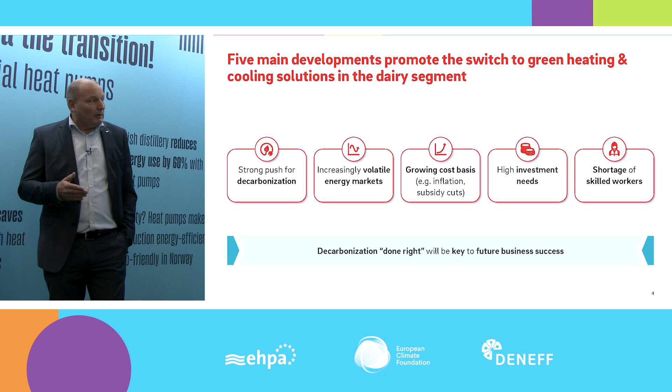These are the 5 main developments we are going to promote. It's a strong push for decarbonization we see in the market. Everyone is asking us, how can we do this, especially under the ongoing threat we see in the current energy price development. We see very volatile energy markets, especially in power generation. Of course, we are phasing out large-scale power plants in the near future in most European countries and we have to renew the power, and how can we solve this?

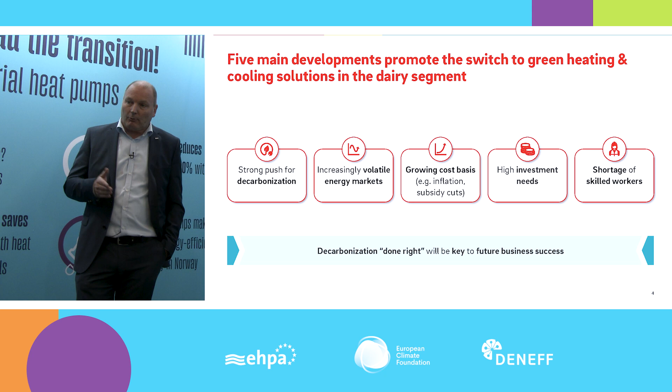We see the high investment needs in those projects as well. And a very, very crucial topic is the shortage of skilled workers we have. We have to implement these projects. And as you see, for instance, we are going to invest more than 43 billion euros in the next 4 years as E.ON Group in grids and projects across Europe.

But we need really good and many skilled workers to realize all these projects, because here we really see a shortage in the market. So the decarbonization done right will be, of course, for our clients as well as for us, a very big piece of the future business. And therefore, we really need to develop our solutions jointly with our customers.

Next slide, please. We always build together dedicated projects. We do not take any project off the shelf. Every project is unique in our development, and that's the very core of the business we are doing.

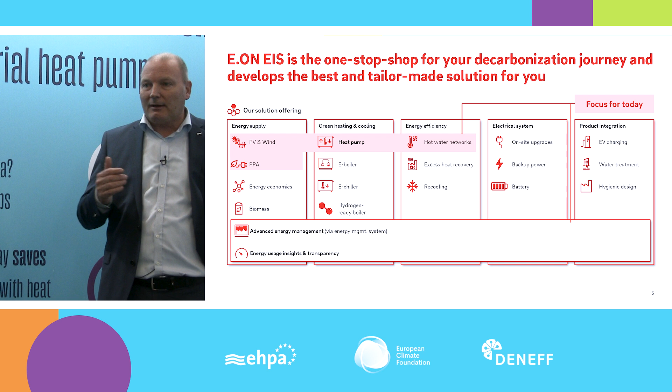So what we are focusing on here is heat pumps, and we will later talk about high temperature heat pumps, because heat pumps as a mass product is not meant here. It's really the industrial design of heat pumps for high temperature processes. And this is, from our perspective, also the key driver in the future we need to tackle.

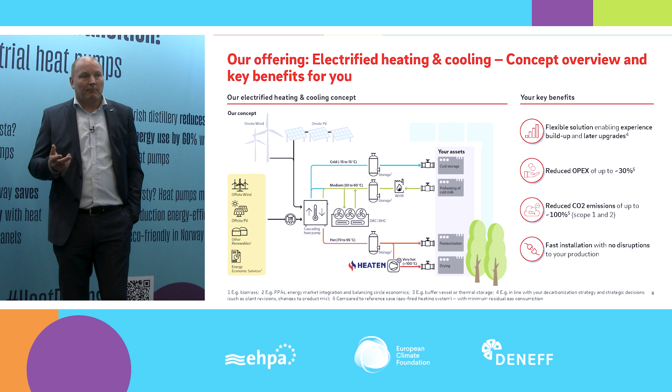So next slide, please. Here I've shown a typical solution of the future we see. So of course we need a large portion of renewable energies in the future. That means either on-site or mostly off-site, we need to generate green power. Green power can come from wind, solar fields, biogas, biomass solutions as well, and other sources in the future like hydrogen. But as long as we do not have a really mature market to replace natural gas by hydrogen, we really need to find other solutions, integrating PV and wind assets into the decarbonization roadmap we see in our client base.

So if you then deliver the power on site, we want to install large-scale heat pumps using waste heat potentials from customer sources on site, from production processes, from cooling processes, for instance, or other environmental heat sources like rivers, and then boost this up in a big heat pump to get to green heat. So we see here a dairy process where we can do this. We can do it for cool storage. We can do preheating of the cold milk, the pasteurization process and the drying process in the future via heat pumps. These are the core elements we are going to identify.

But what is key in all of these projects is you really have to look into the existing infrastructure on the premises of the client and what needs to be optimized there to run the heat pump in the most efficient way. Otherwise, the heat pump does not make sense if the secondary system behind it is not really adapted to the heat pump. So this is a crucial part of the whole project, and there we go with our engineers into the field, look into the details at the client sites and make a proposal.

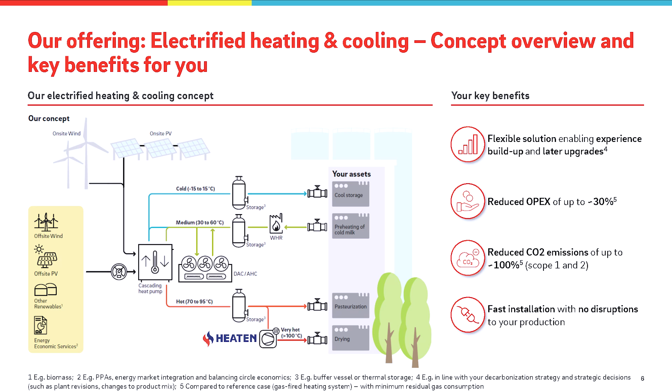And what are the key benefits? You can reduce your OPEX. If you go for such a solution, you are pretty flexible with regard to power and cooling generation with heat pumps as well. You can reduce your carbon emissions by 100% with green electricity running a heat pump, and you have a fast installation without big disruptions of the processes on your end. So this is a very big advantage of heat pump systems.

Next slide, please. Yes, this is a typical process of how we go into such projects. So first of all, we get in touch with you and make the first presentation of what a solution could look like. If you're interested, we sign an NDA together to exchange the data and information needed to run our simulations. What might be the best concept? Within 6 to 8 weeks, we make a first initial concept for such a project, and then we discuss it jointly with our clients, whether this is the right way forward, where it may need to be fine-tuned, and how we can then come to the final project setup.

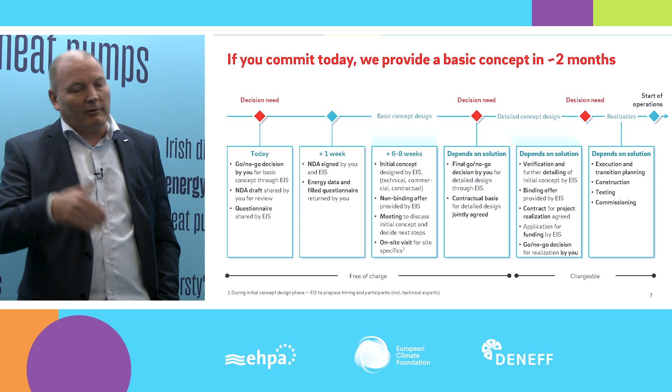And afterwards, when the decision is taken, we really go on to the next steps and develop the project until the end, into the contract, into the realization phase, where we take responsibility for the execution and the transition planning, the testing, commissioning, and all stuff like that before we hand it over to our clients.

And this is a typical way forward in our projects. And at the moment, we are running a lot of those projects across Europe. And you are sitting here in one of these buildings where we are also going to install a multi-megawatt heat pump to produce cooling and heating. So this is a very interesting project, and we are also proud of being part of the project as well.

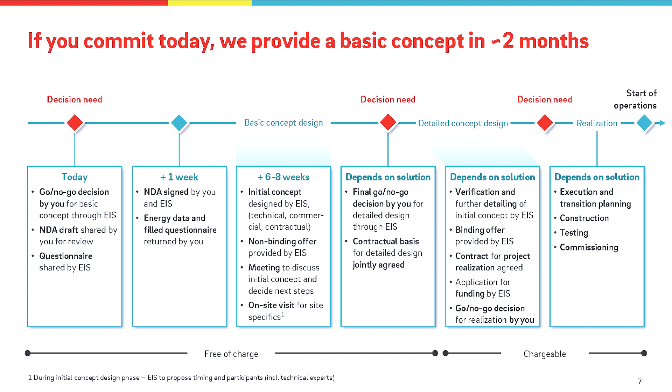So from our belief, heat pumps are really the core technology for the future to decarbonize the industry. And we are happy to support. And now I would like to hand over to André from Heaten.

Thank you, Christoph, for the nice introduction. My name is André Bechem. I'm the head of sales of Heaten. And now a few words about Heaten. So I think all of you are familiar with E.ON, but I think not everyone has heard about Heaten.

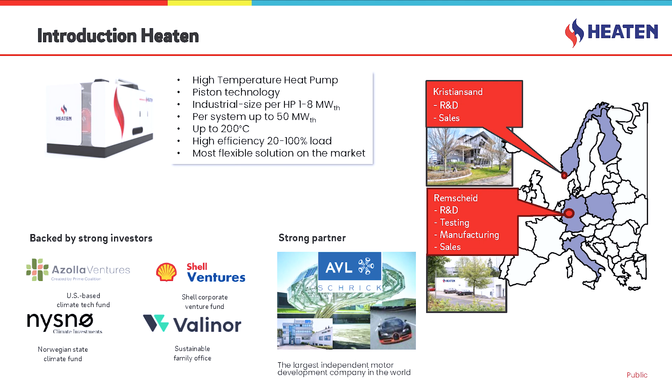Heaten has developed and produces and sells high temperature heat pumps. It's a piston-based technology with an industrial size of 1 to 8 megawatt per heat pump. We can reach up to 50 megawatt per system if we install it in parallel or in a cascade. And we can reach temperatures up to 200 degrees.

And due to the piston-based technology, we have a very high efficiency over a broad operating range of between 20 and 100% load. And due to this, we are the most flexible solution on the market in this megawatt range.

Currently, we have our head office in Kristiansand in the south of Norway, where we have our R&D and sales. In Remscheid, just 35 minutes from here, we have also our R&D department. We have the test bed and the testing, the manufacturing and the sales.

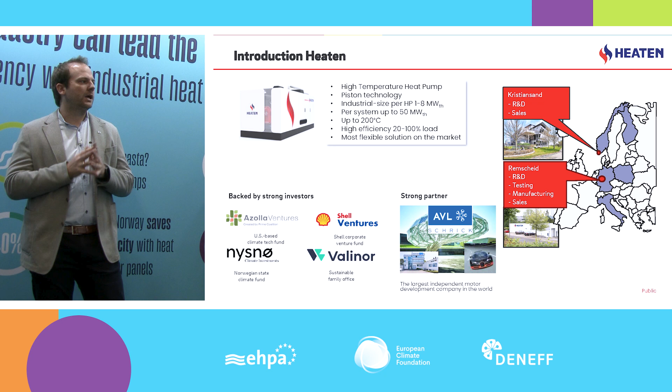We are supported in the development by a very strong partner, AVL. AVL is the largest independent powertrain developer worldwide, and they are the expert when it comes to piston-based engine and compressor development. And we are also backed by very strong investors. We have Azolla Ventures, Shell Ventures, Nysnø, the Norwegian State Climate Fund, and Valinor behind us.

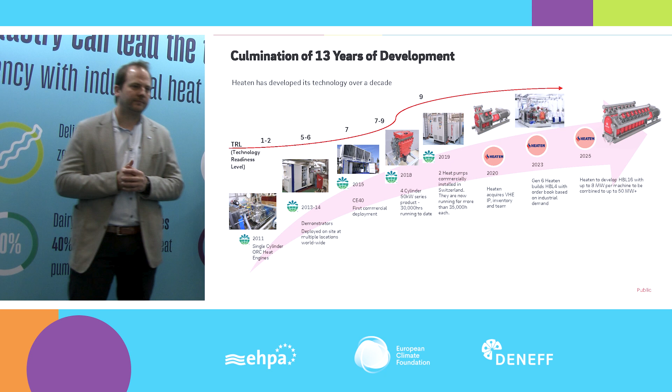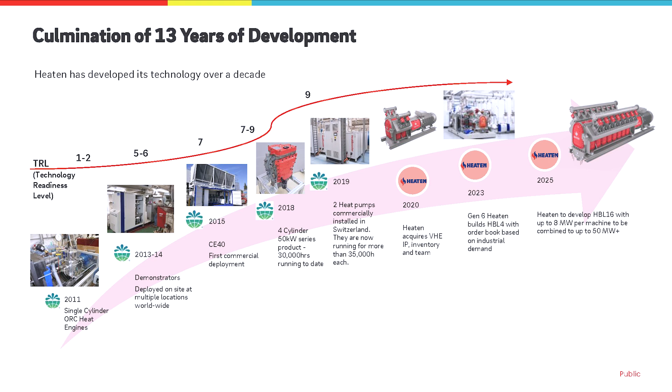Next slide. Looking a little bit to the history, where we are coming from. So everything started in 2011 with an ORC-based system, so converting thermal power into electricity. The key know-how and knowledge about lubrication, the high temperature working fluids and all this stuff was already gained here. And then in 2017, the idea was born to make the process reverse. So in 2018, the first prototypes, in 2019, the first commercially available heat pumps were installed in the field.

However, these machines were great from the technology point of view, but they can only deliver 200 kilowatt each. And especially for the food industry, we get sometimes the feedback that this was a kitchen machine from the sizing. So now the logical next step was to make it much bigger. So we increased the displacement per cylinder by a factor of 8. And in 2023, we had the first HBL4, so heat booster large series 4-cylinder, on the test bed in Remscheid.

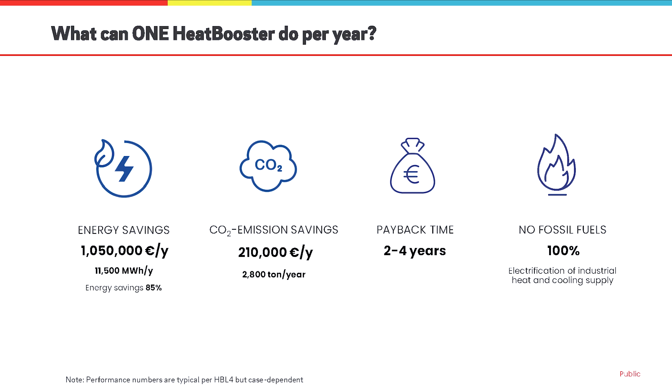Next slide, please. What can one 4-cylinder heat booster do for you? Saves a lot of energy, so up to 1 million euros per year, depending on the case. A lot of CO2 emissions, so up to 2,800 tons per year. We have typical payback time between 2 or 4 years. Of course, case depending on the country, and you get independent from fossil fuel. And in addition, depending on the case, you can also save a lot of water because you can get rid of the cooling towers.

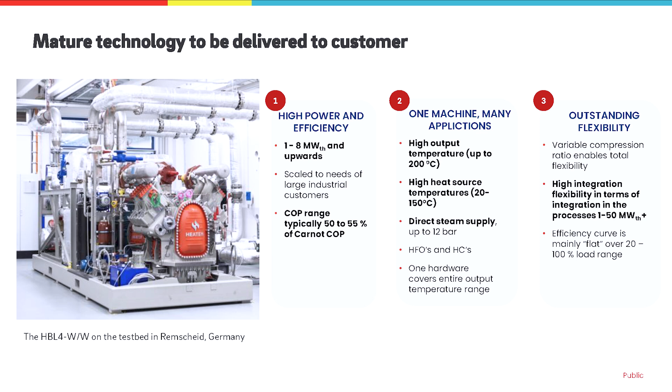And due to the variable compression ratio, we can use all types of HFOs and hydrocarbons in the same machine. And the variable compression ratio also allows us to vary the temperature even with the same working fluid in the same application, with the same high efficiency. And as mentioned in the beginning, we have a variable frequency drive on it, so the efficiency curve is between 20 and 100% of the load, almost flat.

We have the 4-cylinder. This can make, depending on the temperature lift, up to 2 megawatt. If we install several of them, we can reach 5, 6, 7 megawatt. If it's more than, let's say, 6, 7, 8 megawatt, we would use the V16. The V16 is basically the same as the V4, but has 4 times the cylinders.

And with the V16, we reach a theoretical volume flow of almost 6,000 cubic meters per hour, and that's by far the biggest piston-based machine on the market. If we install several of these HBL16s on a location, we can reach up to 50 megawatt. And based on our experience, a lot of food requests are in the range between 1.5 and 30 megawatt, and in saturated steam, the majority of requests are typically between 120 and 180 degrees.

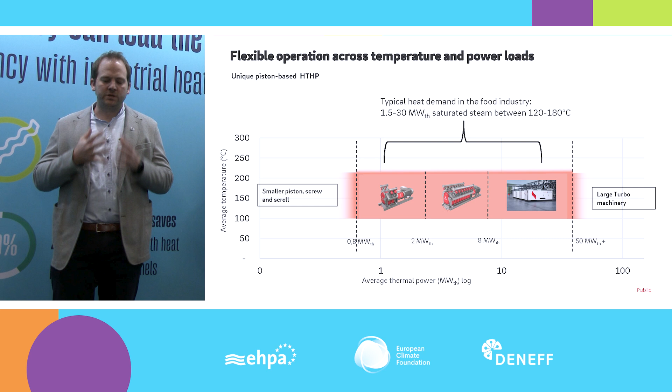And the important thing to mention here is that you can do a pilot, a proof of concept, proof of technology with 1 megawatt, and then later on you can scale it up to 20, 30 megawatts. So you are also flexible in how you integrate the machine, because in our experience, a lot of especially food customers' factories are historically driven, so space is always an issue. Also how to bring in new technology, and we can do it step by step.

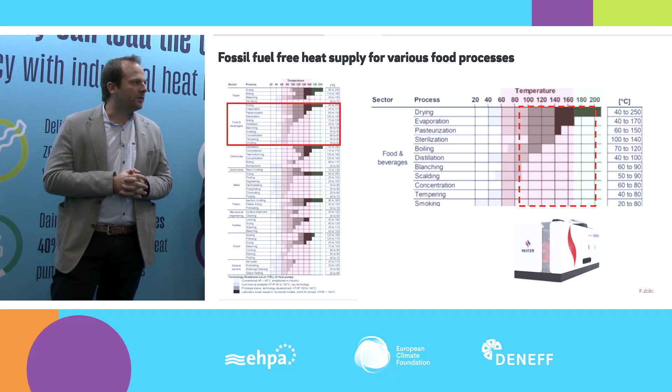Here you can see typical processes we are hunting for in the food industry. So all types of drying processes, evaporation, pasteurization, sterilization, you name it. So all these typical processes. Our focus market is on temperatures above 90 degrees because it's a high temperature heat pump. And between 90 and 200 degrees, that's our core market.

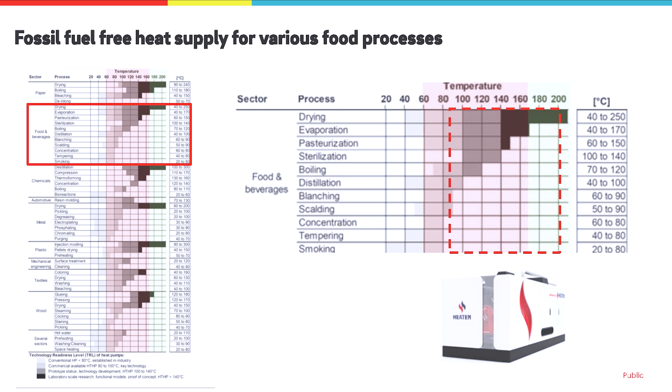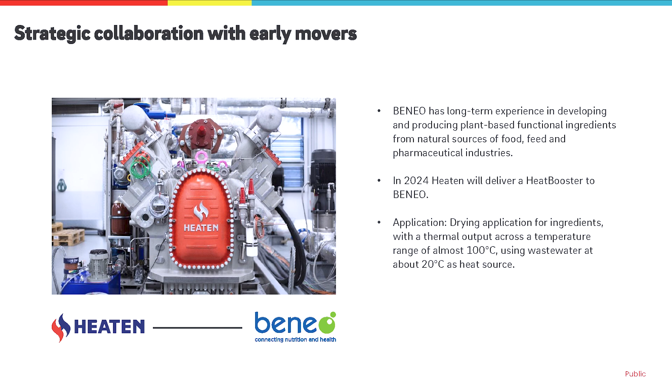And then I'm also very happy and proud to announce here, we had the press release out on Monday, that we also have a strategic collaboration with Beneo. Beneo has long-term experience in developing and producing plant-based functional ingredients. This application seems at first look not that exciting because it's only almost 100 degrees. However, the heat source is quite low at 20 degrees, and we can do this in a one-stage configuration and still ensure more than a megawatt thermal of output.

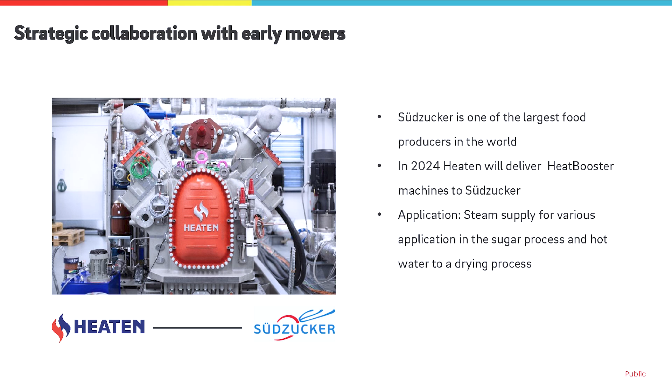Next one. And here, as already announced last year, we are very happy that we have Südzucker as our strategic collaboration partner. Südzucker is one of the largest food-producing companies in the world. We will deliver in 2024 several machines to the sugar processes of Südzucker, and the application is that we produce low-pressure steam for them.

And therefore, we work together with E.ON, and I'm very happy that we have this strategic collaboration with E.ON, so that together we approach the customers and follow up on several projects, because the customers normally want a turnkey solution. We are a startup which does not have the resources to do the complete optimization of the heat supply and everything. And E.ON, of course, has the capacities to optimize the heat supply and develop customized, fully integrated solutions. And we deliver more or less just the technology.

I think the technology is also very interesting for E.ON because you can cover the whole range of megawatts and temperature, and you always use the same technology base. And together with E.ON, we can also do heat as a service, so that you do not own the asset at the end of the day. E.ON can operate it for you, and the integration and all the rest can also be handled by E.ON. And therefore, that's a very fruitful cooperation, and I'm very happy about it.